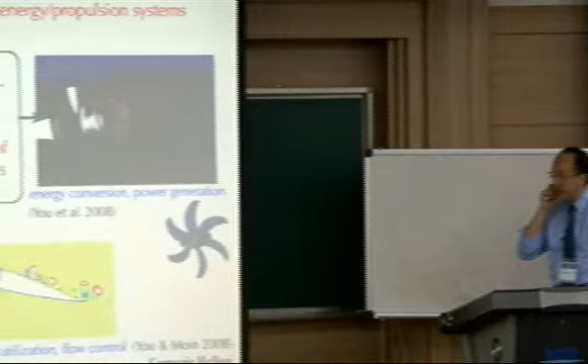We are studying mathematics and developing algorithms to solve the mathematical formula more efficiently. Myself is a fluid mechanician, especially I'm interested in the flow physics in mechanical engineering systems, especially we call it energy and propulsion systems.

For example, that's on the top, isn't it? Yeah. Everybody knows this is wind turbine, and the performance and stability of this energy system is dominated by the turbulent flow around this wind turbine.

And also this is a sort of energy conversion process, jet engine combustor. This is actually a simulation result. We solve Navier-Stokes equation with chemistry. For efficient mixing and combustion and low emission production, we really need to fully understand what's going on inside of this turbine engine combustor.

And this is a recent study working with Boeing. They are interested in controlling turbulent flow over aircraft wing. The main purpose of this research is to enhance the lift force when they take off or landing.

So my research goal is to understand the flow physics around this energy and propulsion systems. And especially, I'm using supercomputers, as we call technically computational fluid dynamics. And my goal is to have a true prediction, not validation of simulation results.

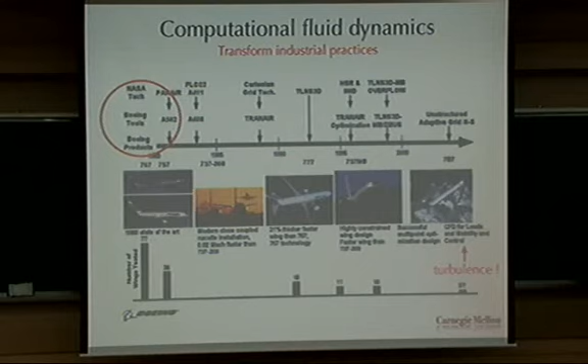The major issue for Boeing is that they want enhanced stability and more maneuverability, especially for the growing market in military applications. They see that turbulence, governed by Navier-Stokes equations - nothing but mass conservation, momentum conservation, and energy conservation - so they are interested in understanding this flow physics using computational tools and computational mathematics.

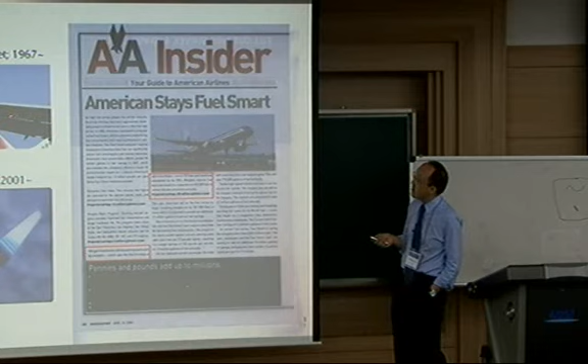This is a recent report published by the American Airlines magazine, I guess in 2008. They reported what they did. Actually, they had an aircraft developed by Boeing, the 737. It was developed from 1967, and is still a major aircraft domestically.

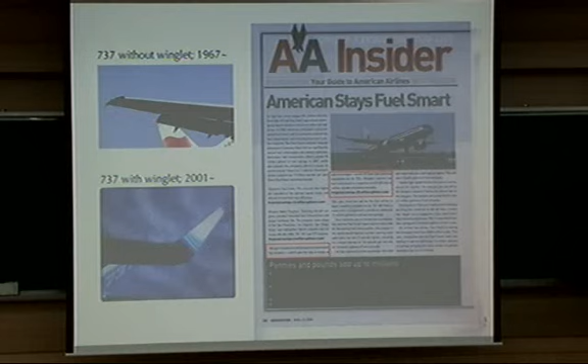And they don't have a so-called winglet, they have a sharp tip. Recently they added a so-called winglet, and found this very simple change reduced about 400,000 tons of carbon dioxide - about 25 million gallons per year. This small change was possible based on the understanding of better flow physics of what's going on at the tip of the wing.

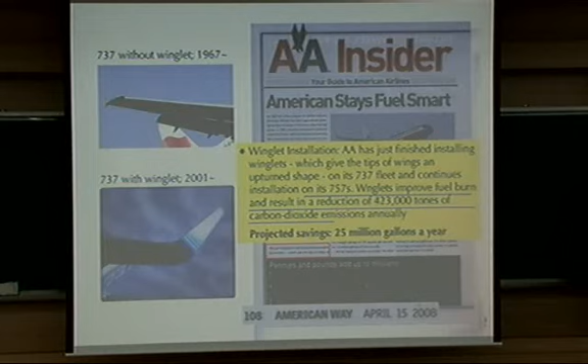Now, I don't want to go into the technical part of my research area, but just give some idea of what's going on in this field. As I mentioned, I'm a fluid mechanician, and I'm more interested in turbulent flow. Everybody knows by the name, turbulence is chaotic and stochastic.

But it's not truly random. Any question? Agreeing with you. Okay.

So turbulent flow is essentially composed of eddies. Eddies is nothing but fluid motion - just imagine it's swirling. These eddies have different lengths and time scales. This plot is nothing but a scaled plot of turbulent fluid motion in terms of wave number and energy.

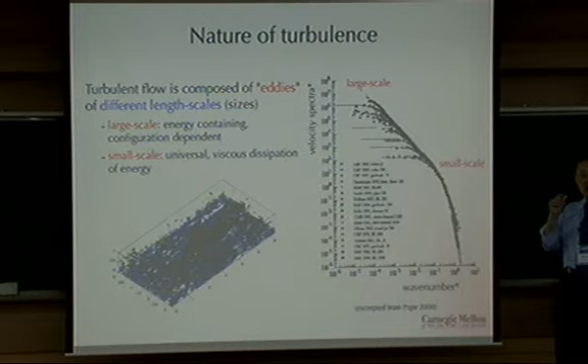Okay, and the wave number is just one over a length scale, right? So this is a large scale fluid motion. Large scale fluid motion essentially has a bigger energy. It's a big swirl, has a big energy, right? And this is a small scale motion. Small scale has a smaller energy, right?

It's quite natural. And then theoretically you can prove all turbulent flow, fully turbulent flow, should follow some sort of a scaling law. Okay, we can mathematically prove this.

Okay, and then there's a little bit of difference in the large scale motion. This is because of the geometry. The large scale motion is really a function of geometry, but the small scale motion is only universal. That's the key of turbulence modeling. We solve this large scale motion accurately, but if you have a good model which can account for the universal scales, then we can save significantly on the computational cost. This is the idea of my computational technique.

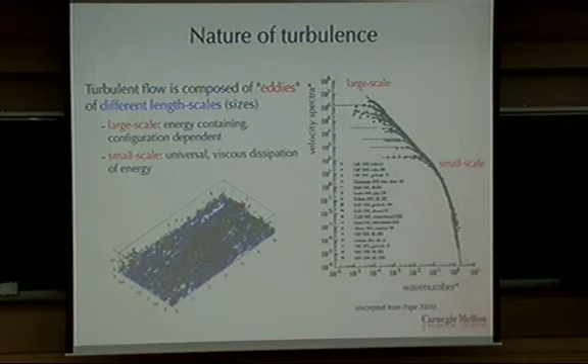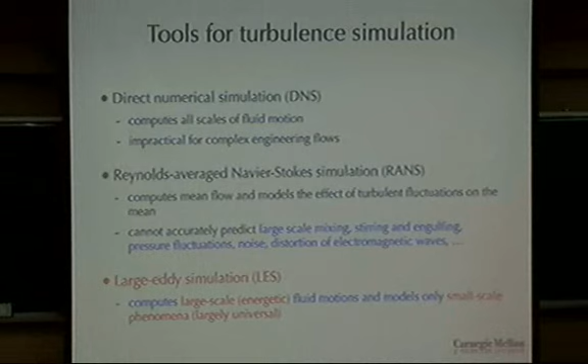So there are three major techniques in computational fluid dynamics. The so-called direct numerical simulation, as the name indicates, solves the Navier-Stokes equations without any turbulence model. That means the mesh, the computational grid, should be smaller than the smallest eddy motion. So it resolves the smallest continuum fluid motion without any turbulence model. So this is a very expensive technique.

And Reynolds-averaged Navier-Stokes simulation is nothing but taking a time average of your Navier-Stokes equations, the momentum equation, continuity equation, and energy equation. In that way, we remove all the scales and we model all these scales using a turbulence model. So it's the simplest approach, but essentially has some limitations.

Especially if we look at aircraft wing prototypes, the major issue there is turbulence, and in that case this technique is really limited. For example, large-scale mixing, stirring and engulfing, and pressure fluctuations, noise, and emissions—these are really difficult to predict using conventional turbulence model technology. This is actually the current state-of-the-art technology in most conventional and commercial CFD tools.

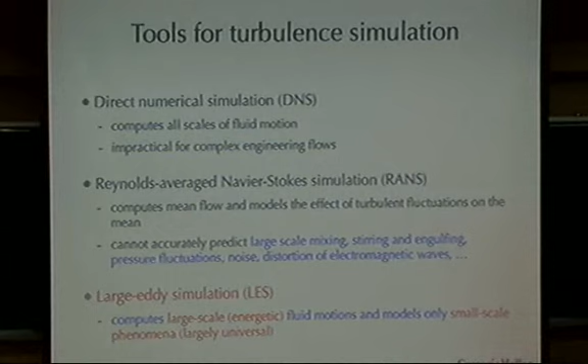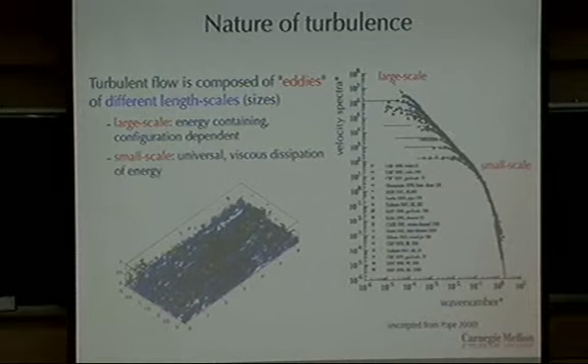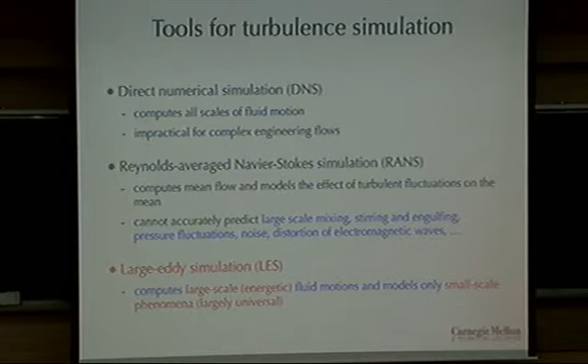Now, recently we are looking at this relatively new technology, about 20 years by now, and we call this Large-Eddy Simulation. Just to remind you about this plot, based on this scaling law, we solve the large-scale motion directly. The grid spacing is small enough to resolve the large energy-containing turbulent fluid motions, and then we model only the universal small-scale turbulent fluid motion. This is called Large-Eddy Simulation.

This is nothing but scale separation using a filter. So filtering is one of the key issues in Large-Eddy Simulation. This is a filter operator, a convolution. G is the filter, and U is the instantaneous velocity component, and this convolution integral gives you something like a low-pass filter.

And this is a momentum equation, nothing but the momentum equation of fluid motion. By taking the bar as a filter operator, we have an additional term coming from treating this nonlinear term. We call this the subgrid-scale stress tensor. This is the term we need to model because of this nonlinearity. This is turbulence closure.

The idea is that again we resolve large-scale fluid motion, but for high-frequency, small-scale turbulence we use a subgrid-scale turbulence model.

This is an actual simulation, but direct numerical simulation you see that even very small fluid motions are captured by the computational mesh. And this is the LES flow field. The large scale motion is actually the same, because I just filtered this field using a low pass filter here.

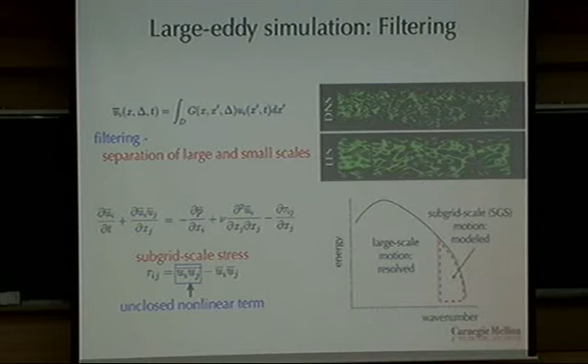Presumably you want to design the plane so you get rid of that large scale motion, is that right? In terms of aircraft, essentially what they want is the correct lift curve as a function of angle of attack and flow condition. But I will show you that even that primitive integral quantity is not correctly captured using a conventional tool.

So this is a bit of detail about turbulence modeling. We use the so-called eddy viscosity model, based on the Boussinesq approximation, which makes an analogy of turbulent mixing to molecular mixing.

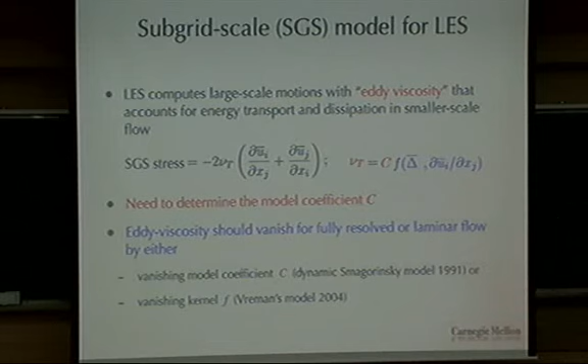This is the state-of-the-art technique in the industry. I'm working with Boeing, and my program officer just sent me this plot.

This plot is nothing but the lift coefficient. If you multiply density times velocity squared, you get a lift force. This is the angle of attack—the angle of your aircraft. If you have a high angle of attack, you get higher lift. This is typically the situation during takeoff and landing.

The blue lines are mostly RANS results, the Reynolds-Averaged Navier-Stokes results, and the black line is experimental data. Some people may say this follows quite well—the results aren't bad, but it's tricky, because they are playing with results around this area.

We call it the stall. They really want to improve prediction of the angle of attack at which stall occurs. But without correctly predicting this stall, it doesn't make sense in the computational area. So stall prediction is the key there. The red is the recent LES, Large-Eddy Simulation, result.

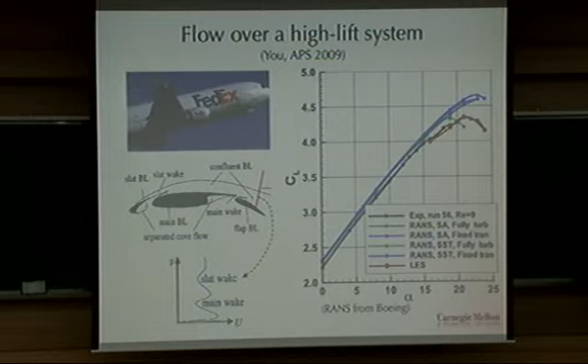That's in degrees on the horizontal axis—the alpha is in degrees. Typically they have about 20 degrees, and beyond this angle they get a stall, where the aircraft drops lift force. So the LES is very good, still.

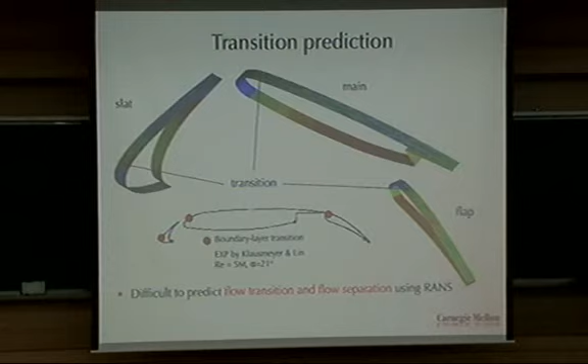This is one reason why the conventional tool isn't accurate enough. Something happens on the blade surface—we call it transition, where well-defined laminar flow becomes unstable and then turbulent. This point we call transition. The conventional tool solves the Navier-Stokes equations assuming there is always turbulence, though some tricks let them specify where a transition might occur.

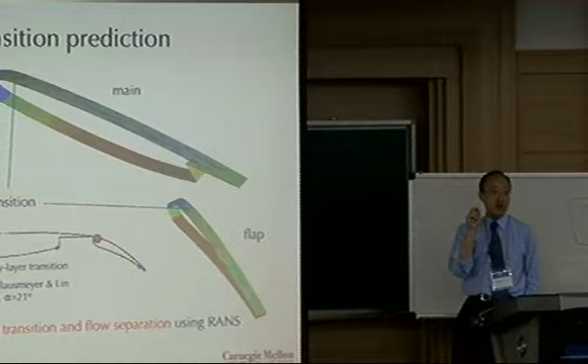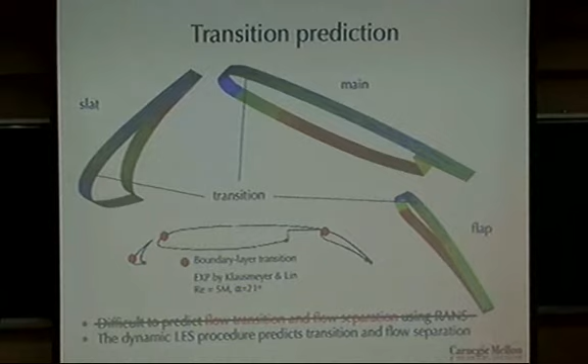But a priori we don't know where the transition is. So the conventional tool is really limited in predicting these transition locations, and we found that correctly predicting transition is key to this flow prediction. The LES is quite good at predicting the location of flow transition compared to experimental data.

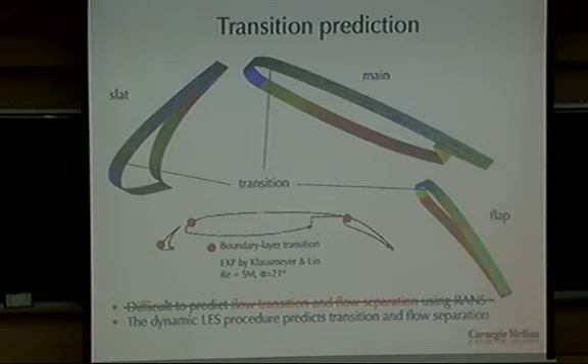You see there's a smooth streamline here—this is the skin friction, nothing but the drag on the surface. Then this smooth flow suddenly becomes turbulent, and there's a sort of hot spot, because this qualitatively marks the location of transition.

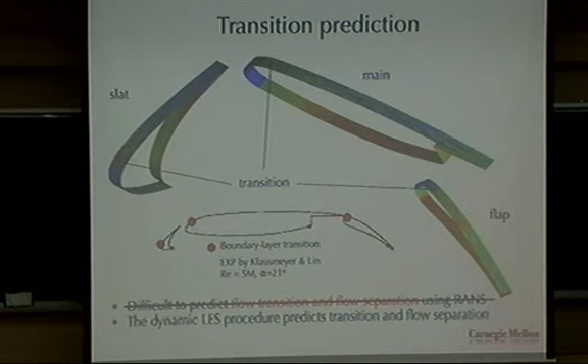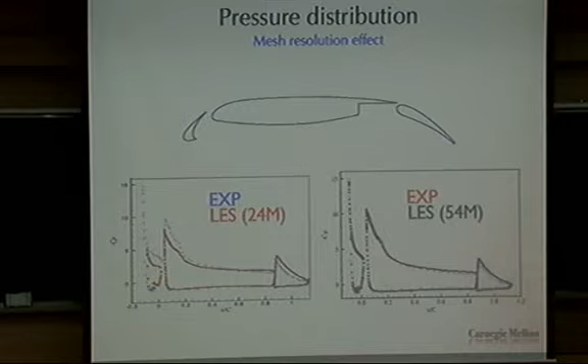The problem is, as I mentioned, we were able to refine our grid until we got a good result. For example, the blue and red symbols here are experimental data. In the first shot, we used 24 million mesh points to simulate the flow I showed, and the result wasn't really great in terms of the pressure distribution on the surface. If you integrate this pressure, you get the drag and lift force. Then I doubled the mesh points, and finally got a very nice solution.

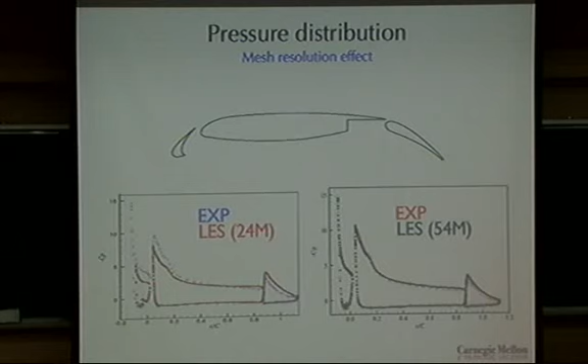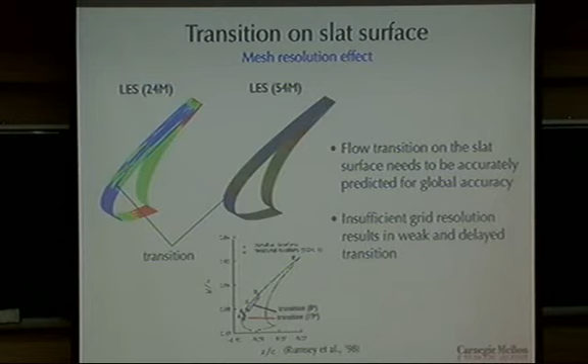This is validation, not prediction—I need the data to validate my simulation result. This is the state-of-the-art Large-Eddy Simulation. The major reason for this dramatic change and mesh dependency comes from the prediction of transition location. Again, transition is the key issue in turbulence prediction.

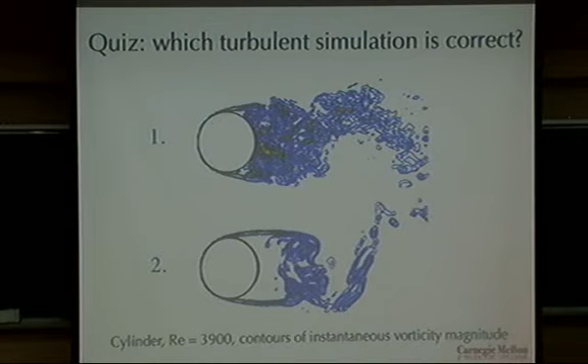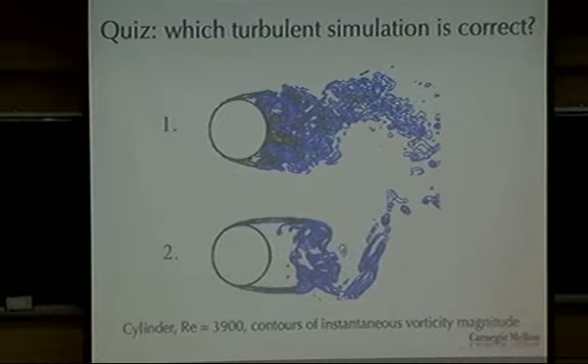Let me ask you, in this case, which turbulence simulation seems correct? Number 1 and number 2? Number 1 looks better because it looks messier, so I imagine it should be right.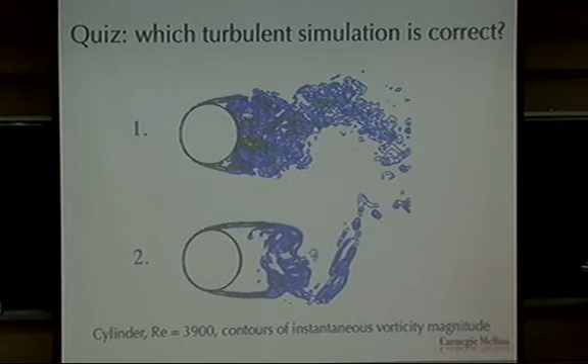There's an even smaller turbulence case—it would pretty much look like a well-resolved simulation, right? Here, this is number 1 case and number 2 case. The red line is number 1, the blue lines are number 2, and the symbols are experimental data.

Now, number 1 looks like a great simulation, right? It's the better-looking simulation—we spent 10 years on it. But if you refine your mesh more and more, your solution gets closer to the second case, not to number 1.

So we cannot validate our simulation result. It just gave up. About 10 years later, there were new findings, okay, this is something like we use a very coarse mesh along the span. That means we cannot resolve the large-scale motion correctly, but the comparison was better than the refined simulation.

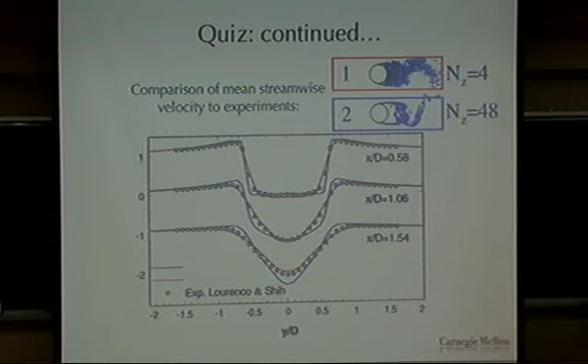This was a puzzle. And then later, other experiments found that the previous experiment was wrong. We spent just 10 years predicting the wrong result, validating against the wrong results, okay.

So this is the motivation. We really need a sort of uncertainty quantification in our simulation. We cannot rely on experimental data anymore, okay. So your noisy computation matched the noisy experiment.

Vibration, yeah. For example, in this case, the reason we have smaller scales in the area is noise and numerical artifacts, simply. And in the experiment, there was vibration. All the time, experiments couldn't control the inflow condition and wall roughness, actually.

And then later we found this flow is really, really sensitive to those conditions. So it's like a jump, quite a discontinuous jump in the behavior. It's not really a jump, but we call it subcritical Reynolds number.

The Reynolds number is nothing but the ratio between the inertia and viscous force. If you have high inertia, then your flow tends to be more unstable. So at this Reynolds number, the flow is really, really sensitive to the inflow and boundary conditions. That was the problem.

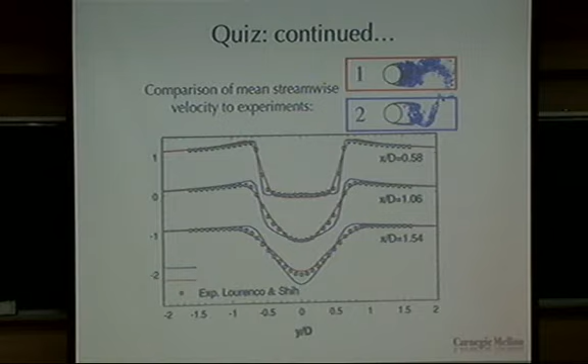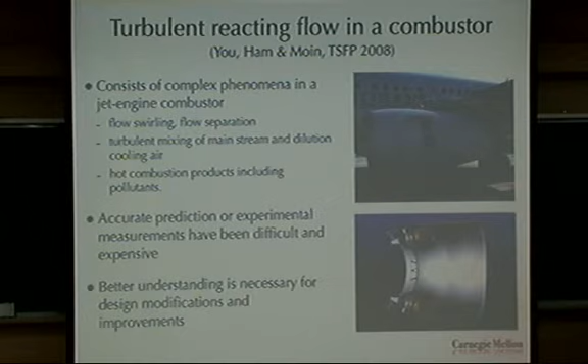Another example: recently we published work in Turbulent Shear Flow Phenomena. This is a real jet engine of an Airbus 318, okay, and this is the Pratt & Whitney engine, technically the Pratt & Whitney 6000 engine developed by Pratt & Whitney.

And they lost about $4 billion because of this engine, and fired about 100 people related to this project. The reason was that they wanted to reduce the number of blades inside the engine, and computational prediction told them it's okay, it works. So they made a prototype, then conducted full experimental validation, requiring about $4 billion for this engine.

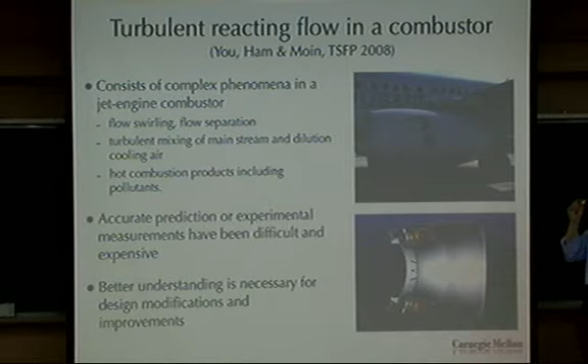So they came to us, actually, when I was at Stanford, okay. This work was done at Stanford and at Carnegie Mellon, okay. This is a Large-Eddy simulation of turbulent combustion inside of an engine, okay.

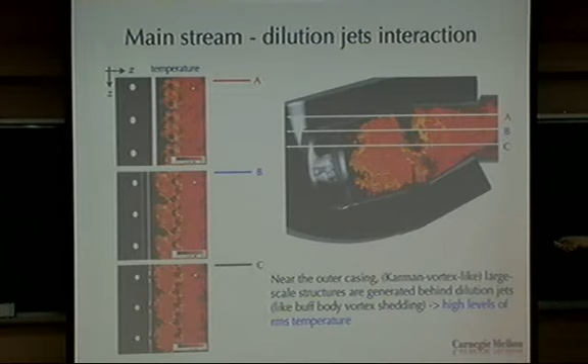For this, we actually account for about 1,000 chemical reactions, which I don't show here. Okay, so if you see here, it's not clear, but we also have spray particles, which is liquid fuel injected through the bore.

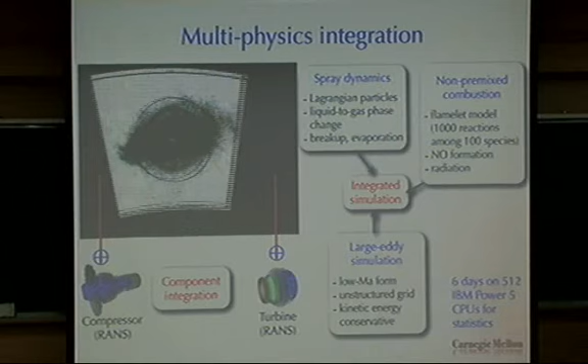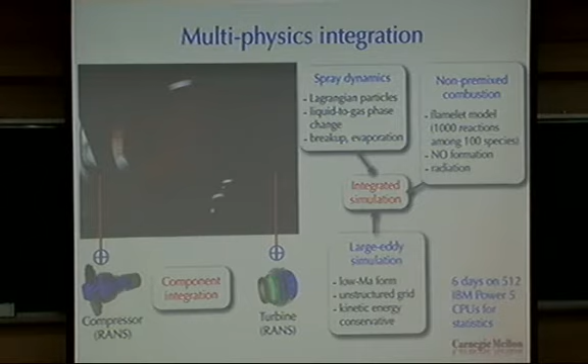And then we had a comparison with the experimental data that Pratt & Whitney had. And luckily, it was a very easy validation. You see, what they could measure is just 5 points at the end of the engine.

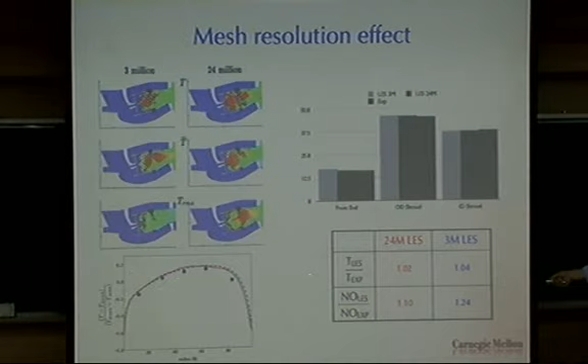They couldn't see anything inside the engine before this simulation, because the temperature is really high and the geometry is relatively small, so no probe can go inside. What they could measure is just these 5 points, time and temperature.

This is a mean temperature and NOx emission comparison with experimental data and LES. I cannot show you the exact numbers because it's classified for them, but in general, the comparison is pretty good. And if we increase the mesh resolution, the solution approaches closer to the experimental data. So it was a very nice simulation.

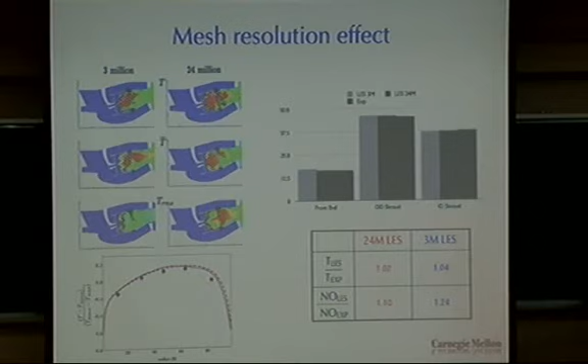And the major problem was that, based on this mean data, they couldn't understand why their turbine, located just downstream of this combustor, breaks down so easily.

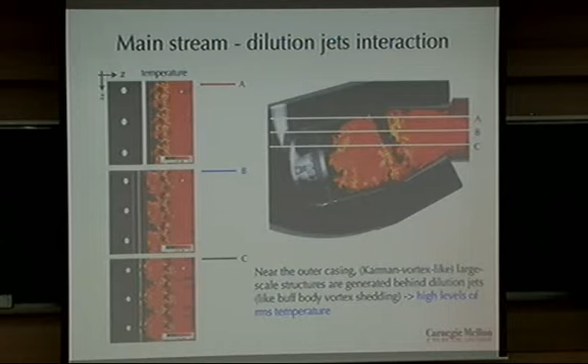So this gives some qualitative explanation why the turbine blade just behind this combustor suffers from thermal fatigue, because there was a dilution hole which gives cold air inside the engine to cool down the jet. Otherwise, your turbine blade will melt down.

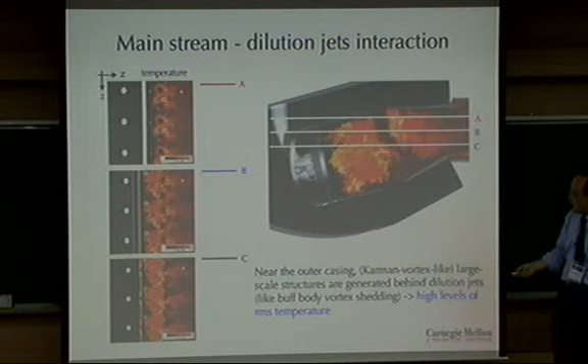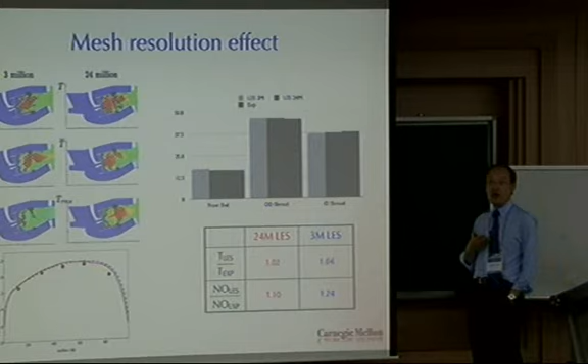This interaction actually produces so-called Kármán vortex type vortical structures downstream, and this introduces coherent time-dependent thermal hot streaks, and these hot streaks were not well measured by the experimental tools. That was the problem. So they typically had some sort of safety factor based on this data, and designed the cooling system in the turbine. But it was not actually enough for their new engine.

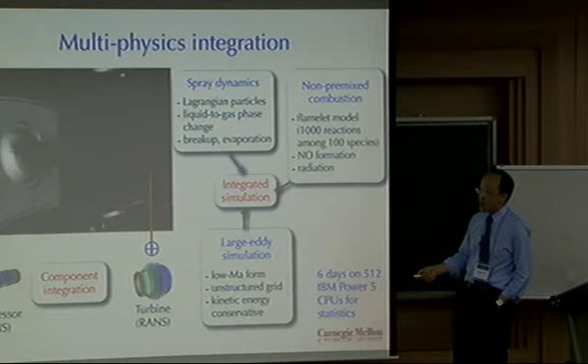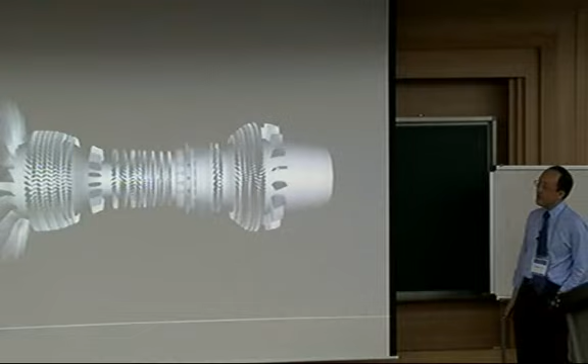I myself simulated this part, a very small part of the engine, and other people simulated the flow around the compressor and the turbine. We combined all of these components in the computational world for a whole engine simulation, using MPI to communicate flow information through multiple CPUs.

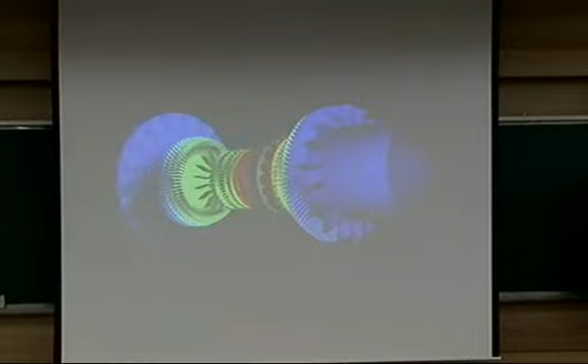This is probably the velocity contours around the engine, and the CTO at Pratt & Whitney told us that this is like something like going to the moon.

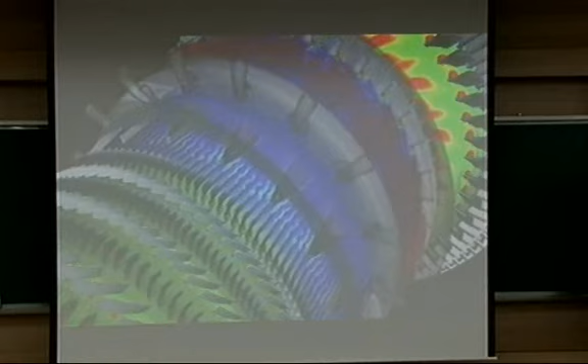There's a huge amount of mathematical effort there, but our service is mostly in the end-user part. It doesn't really derive much mathematical equations, but we try to discretize this equation more efficiently in a more stable way, and reformulate the equation in a more conservative form, because our major goal is to conserve mass, momentum, and energy.

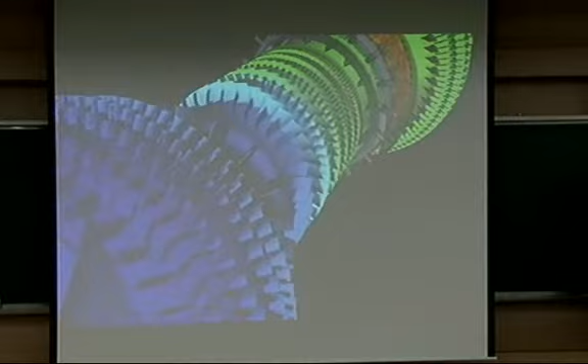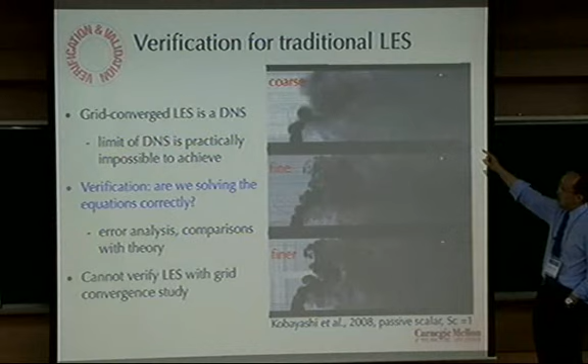Let's go back to the validation issue. The current LES is not a tool you can use to predict something, and this is neither really validation. So the idea here is that we want to improve the Large-Eddy simulation framework to have a sort of self-verification capability.

As I mentioned, LES, Large-Eddy simulation, is simply based on the separation of scales, large-scale motion and small-scale motion. If you have a smaller grid and smaller filter width, that means you will resolve smaller scales more, and model even smaller scales. So if you refine the mesh more and more, the solution will converge to the direct numerical simulation result, which is the solution without a turbulence model.

This is not the true solution we call the Large-Eddy simulation solution. This is the direct numerical solution.

Verification is nothing but the issue of whether we solve the equation correctly. But this mesh refinement gives a correct solution that is not the solution of your Large-Eddy simulation equation—it's a solution to the direct, unfiltered Navier-Stokes equation. So it's really difficult to verify whether we have a correct model in our simulation.

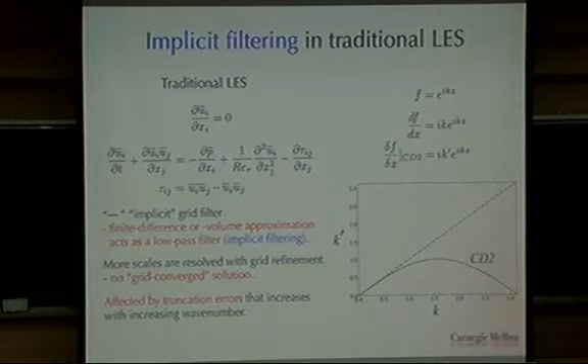In conventional LES, we don't actually perform any filtering. We simply assume that the solution we are solving is already filtered using the grid size—this we call an implicit filter. That's the reason why any solution is highly dependent on the grid spacing.

As I mentioned, more scales will be resolved with grid refinement, and there will be no grid-converged solution. If we do have a grid-converged solution, then the solution is the direct numerical equation solution, not this equation's solution.

One of the key drawbacks of this approach is that this turbulence modeling term is highly affected by numerical errors. That's because conventional CFD uses low-order discretization schemes—second order, third order, fourth order at maximum.

For example, this is an exact function, and if you take its derivative in terms of x, you get a coefficient of ik. This is called the wave number.

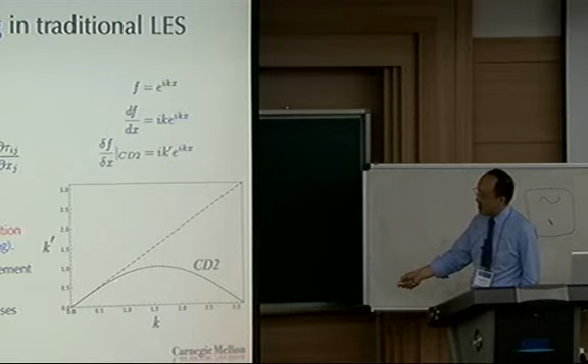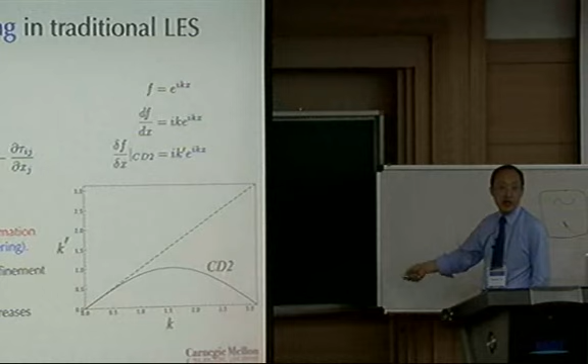But if you apply a second-order central difference scheme to this equation, you get a modified wave number, simply sine of k delta x over delta x—this represents the resolution of your scheme. In this plot, if you have the exact wave number, you get a linear relationship—this is exact versus k, where k-prime is exact, giving a straight line. But because of numerical error, the second-order central difference scheme deviates from the exact solution at high wave numbers. These numerical errors get included in your turbulence model.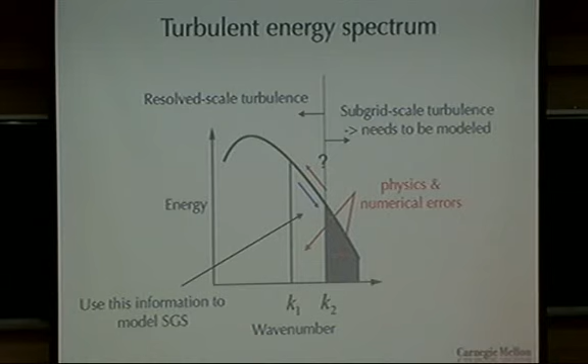So now we want to take an explicit filter of the equation, especially in the nonlinear term, because this nonlinear term will produce smaller and smaller eddy motions. The idea is that we discretize our governing equation on a fine mesh, but keep your filter width so your resolved scale stays the same. That way you can reduce the influence of numerical errors on your turbulence model.

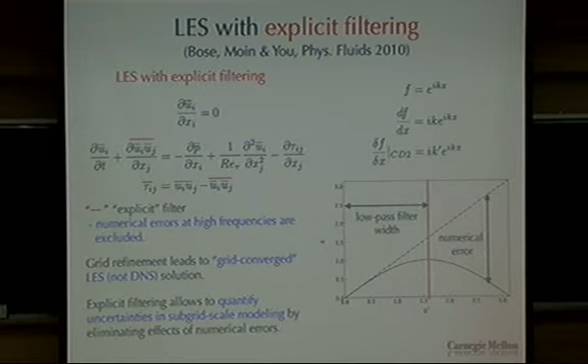Again, your discretization is performed on a baseline grid, but you model your turbulence on filtered mesh points. So if we take a low-pass filter, an explicit filter of this, then we discard the contaminated noise from your turbulence model and use only the information which is accurate enough. That's what we call explicit filter LES.

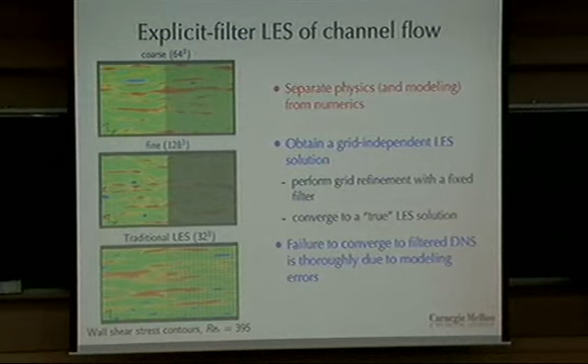This is a traditional LES on a 32 cube mesh. We have a box, this is flow through turbulent flat plates, technically called channel flow. And this is the explicit LES solution, with 64 cube and 128 cube meshes. In the conventional technique, if you refine your mesh gradually, you gradually resolve smaller and smaller scales, but these scales are just numerical errors.

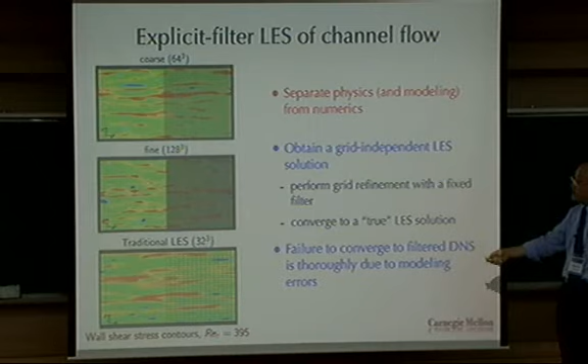Now, even though I have a finer mesh, I will fix my explicit filter width, exactly the same size. That way we have roughly the same large scale structures, and then model the small scale eddies more accurately. The idea is to separate physics turbulence modeling from numerical errors, and in this way we can obtain a grid independent LES solution.

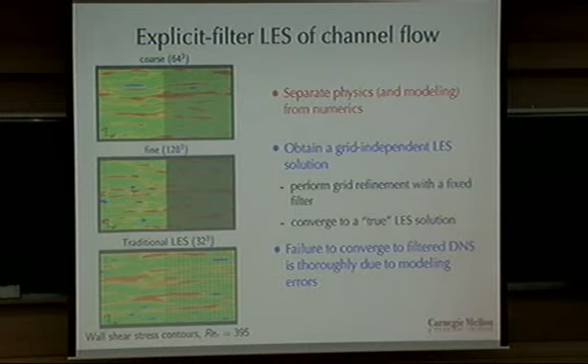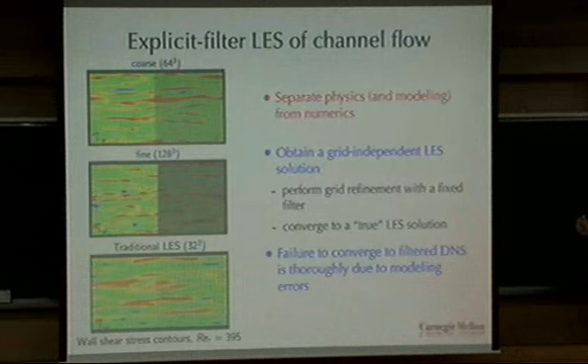Now we can verify whether I am solving the equation correctly. That's a different story from whether I am having a good result - this is a validation issue. If your solution doesn't correspond to good experimental data or numerical simulation data, that means your model is not good, because now your turbulence model is nearly numerical-error-free. So this is a quantitative validation of this methodology.

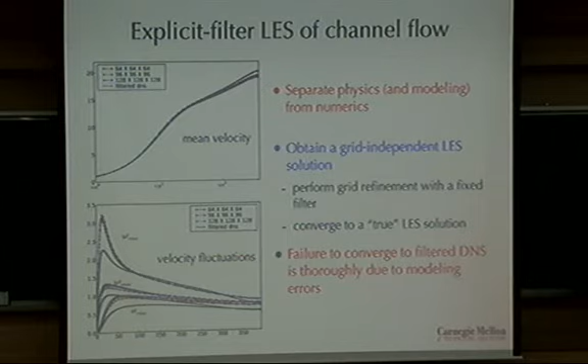The solid black line here is the direct numerical simulation data filtered with the same explicit filter width I used for LES. You see there are 3 different lines with mesh refinement, but since I have the same filter width, you can prove the solution converges to itself for the LES solution, not to DNS. So we have a grid converged solution.

But the solution is not that great at that given filter width - this is the capability of the current turbulence model. Based on this information, we have room to improve our turbulence model more accurately.

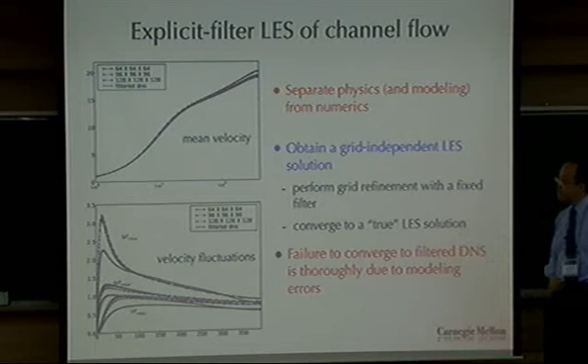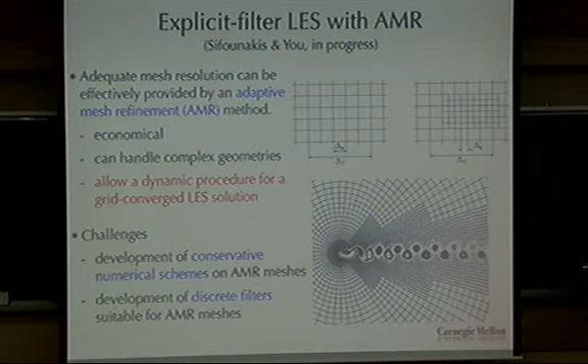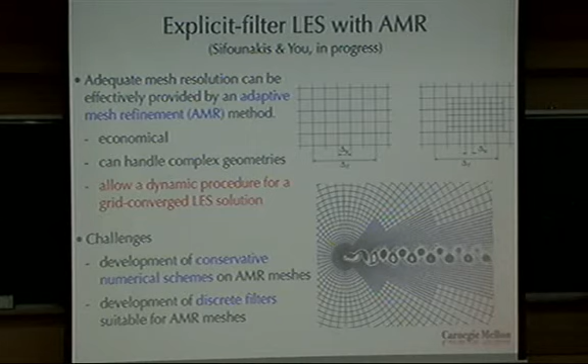Refining your mesh in simple geometry is not that difficult, but with complex geometry it's really a big burden. So we are currently working on implementing adaptive mesh refinement technique, because, for example, this fluid motion - not turbulent anyway - but essentially the turbulent vorticity concentrates in a small portion of your computational domain. There's no reason to refine everywhere. This is the research I'm working on these days.

So this is my summary. This was my research goal: to utilize, design and develop computational fluid dynamics tools to understand flow physics in energy systems and propulsion systems.

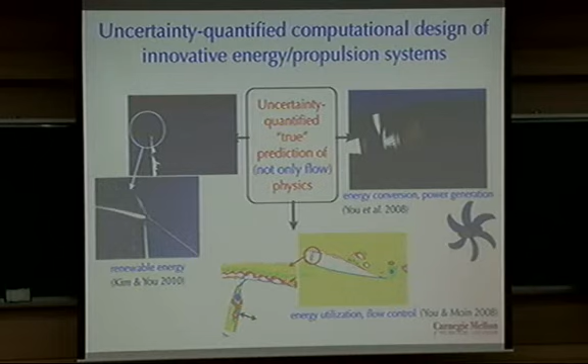And now we know that we are heavily relying on experimental data still. For us, as computational scientists, we really need a tool which is truly predictive, not relying on any experimental data, to give a better idea how to design innovative systems that haven't been there before. For example, in very extreme conditions - very high temperature, high pressure, as I showed in the jet engine - current experimental techniques are not capable enough. So we have a high need for high fidelity prediction, computational prediction tools, and huge room for improvement, especially in computational mathematics.